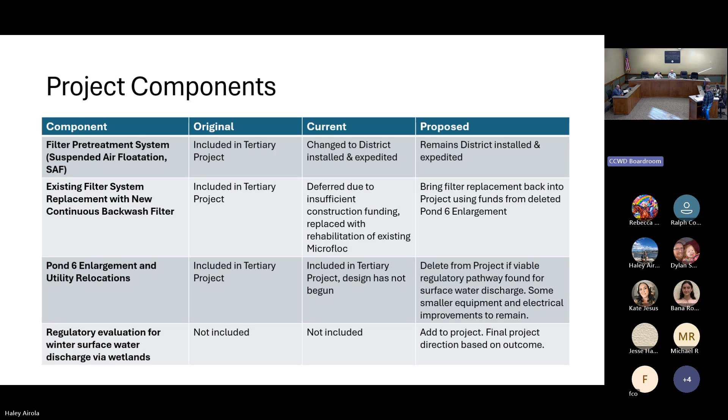There's discharge permit requirements, the nitrogen limits in the effluent that discharges into Little John Creek are a little bit challenging, but we think the existing system right now filters the effluent out of the pond, the treated effluent out of the pond, and sends it to the golf course. But then the backwash that comes out of the filter goes right back into the pond, so it's this never-ending cycle of backwash back into the pond that's supposed to be a finishing pond.

So the SAF is going to extract all that algae and other contaminants out of the water before it gets in the filter. The backwash will be very limited, it'll be really clean in comparison, so we won't have that endless cycle of discharging back into the pond that you have to keep retreating in this cycle. Over time, we think that nitrogen level could go down.

The quality of the water is going to improve. And then we may have to look at some other kind of work, depending on what our nitrogen limits end up being, there might be some other work that needs to get done.

So there'd be some limited Pond 6 utility upgrades for the tertiary pond. There are some pumps at the base of the pond that are kind of a limiting constraint right now because they only pump like 800,000 gallons a day, and our filters are good for 1 million gallons. So we might want to upgrade those so we get the maximum out, and then upgrade them for future expansion of 2 million gallons a day.

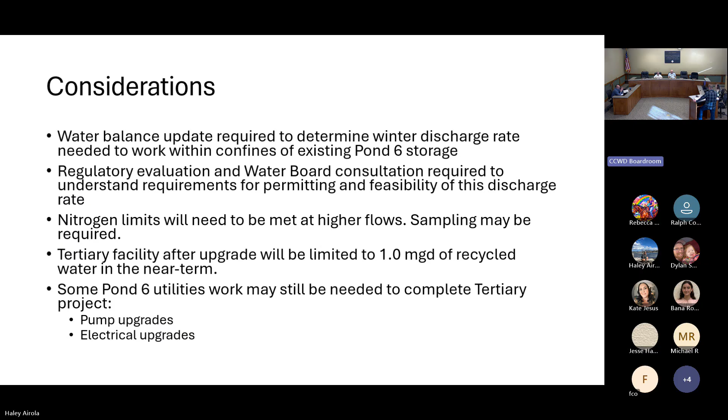This approach avoids partial construction of the dam facility, maintains compliance, but also doesn't put us at risk of going down the route of not knowing for sure if we have enough money to finish this project. It also allows us to get going on this project a lot sooner because the environmental is already complete for the tertiary, and we're at 90% with the tertiary treatment plant design. And if we do get more funding, the dam raise could end up happening the same time or nearly the same time as scheduled for now.

I just want to clarify, this isn't necessarily a big departure for us. This has always been part of the package. In fact, when we renegotiated the letter report in the project partnership agreement with the Army Corps a year ago, we were hoping it would have been done a year ago. We finally got an approved version that we signed a month ago, and we're still waiting for their signature, but we're expecting that anytime.

That's just an example of what Kevin was talking about, the delays that we've seen in this project all along. As those circumstances have changed, we've reevaluated sequencing and prioritization, but this was always a part of the project, and we don't even need to renegotiate the letter report again, which we don't want to have to do. This was already in there. I think the Army Corps will understand that we may be resequencing and pursuing additional funds, but this was always a part of the package.

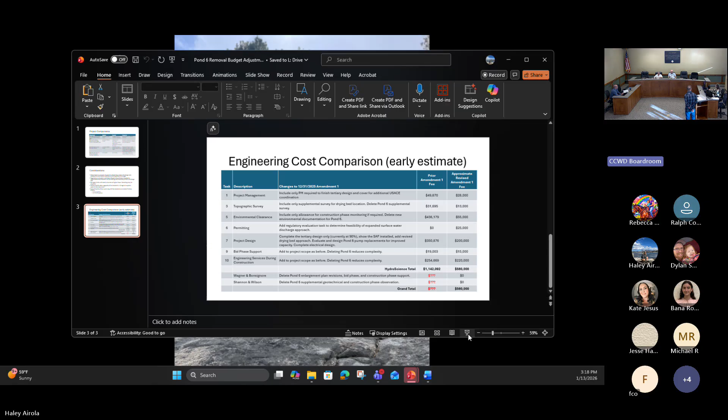And the funds are more and more competitive. We received an increase in the total authorized amount in the Water Resources Development Act last year, but we didn't get it appropriated in the federal budget, and it may be hard to do that going forward. So we're just not sure that we'll receive that additional increment or any future increment after that. We're trying to prioritize and maximize the use of the funds that we have right now, with some uncertainty about costs going forward.

This will help address a huge part of the issue there, and I think set us up for success going forward. So in your addenda, in the package, we have the cost of 1.14 million. That includes the environmental for the dam raise. So what we'd be bringing back to the board for approval, if this engineering committee agrees, would be roughly

$560,000. That would get us the low-level project manager, be a lot of in-house work, finish the project design, and engineering service during construction for the hydroscience to support us during the construction. That'd be all in-kind contributions, and it would go towards our $4 million of in-kind contributions that we're required to pay.

I have a couple of questions for you, Kevin.

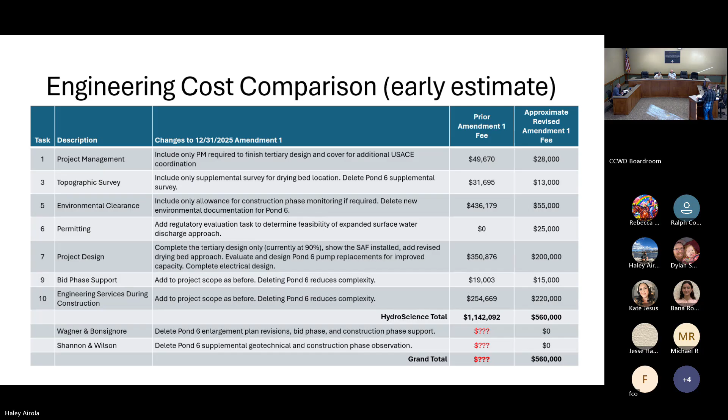This is in my division, and I've looked at it pretty closely, particularly on the dam raise aspect. If my memory serves me correctly, one component of the dam raise was to scour out the existing footprint of the water impound area. What would prevent us from, instead of raising the dam, just doing that part? We've got a lot of acreage there. Would it be beneficial to consider increasing the holding capacity of the dam area without raising the dam?

Yeah, I think that is something that could be looked at. The plans we have for the dam raise were from 2009, and they were making modifications. On one side we were going to build an inside fill instead of an outside fill because we didn't have the property for the water line that had to go through there. But the Army Corps has to administer every construction contract. So if we went that route with the 219 funds, they'd have to go through the full environmental review for the federal government, advertise the project as a federally contracted project, and administer the construction contract. So we wouldn't have the ability to hire a local contractor. These federal contracts are bid on by big name contractors like Kiewit, the type of people that come in and do federal contracting.

Juan, I'm really sorry to interrupt you, but did you want to do public comment for that last item? I see there is a hand up. Sorry about that, Juan. No, Ralph, go ahead. Ralph, do you have public comment on the item before? I didn't pay attention. You're muted, Ralph. I'm sorry, this is for 5A, I jumped the gun, I'll wait till he's done. Yeah, okay, thanks. All right, thank you.

Like I was saying, the mainline installation is complete. It has also been pressure tested and disinfected. The contractors are probably finishing the B tank connection at this point, and they're going to start doing the PRV tie-ins. We have 5 pressure reducing valves through the system. As soon as that's done and the main line is online, we're going to start doing the service lines, followed by the paving.

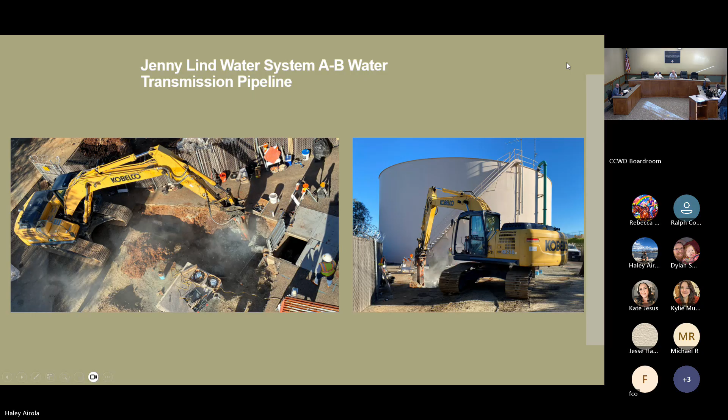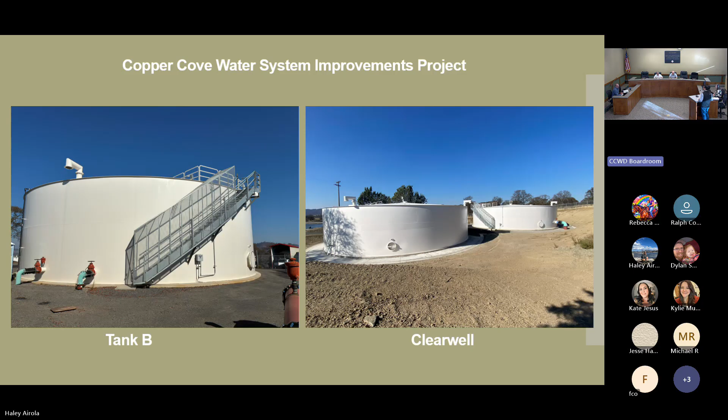This is going to be the Clearwell and B tank projects at the Copper Cove. B tank on the left had the year inspection after completion, and there was some corrosion rust built up on the upper, above the water level. So with that said, Crosno is going to drain the tank, recoat it, and complete the inspection. On the right, the new clearwell passed with no issues on the year inspections. The following tanks are going to be inspected at their year mark. Any questions?

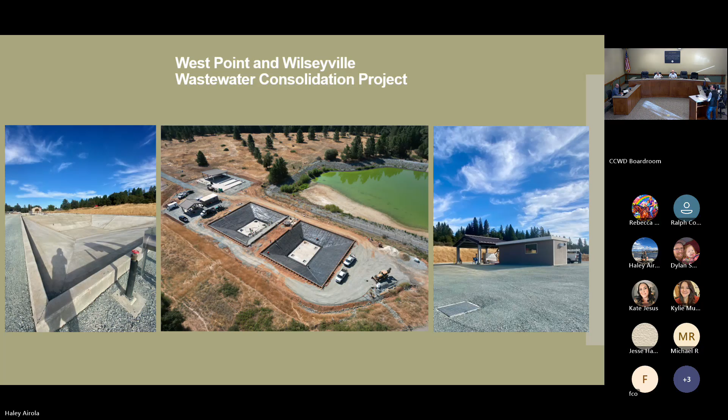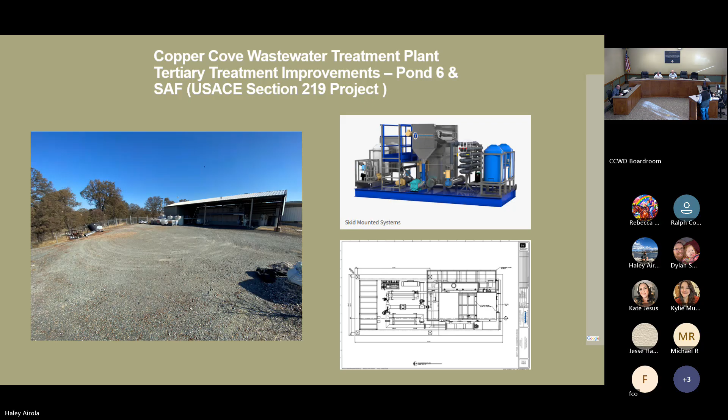As Kevin mentioned, this is the Copper Cove wastewater treatment plant, the SAF and the Pond 6. I included some pictures where the new SAF is going to be located, next to the Trident filter, right there under the canopy. The SAF filter is going to be in a skid, so our district staff is going to do construction, pouring concrete and piping for the new SAF. Questions? I'll let you know. Thank you.

This is the West Point Drought project. At this point, the phase 1 submittals have been forwarded to Cal OES. That one includes the 60% design, environmental documentation, and permitting. Cal OES has completed its reviews and has forwarded to FEMA. Based on previous experiences, it seems like it's going to be 12 to 18 months before we get authorized for construction.

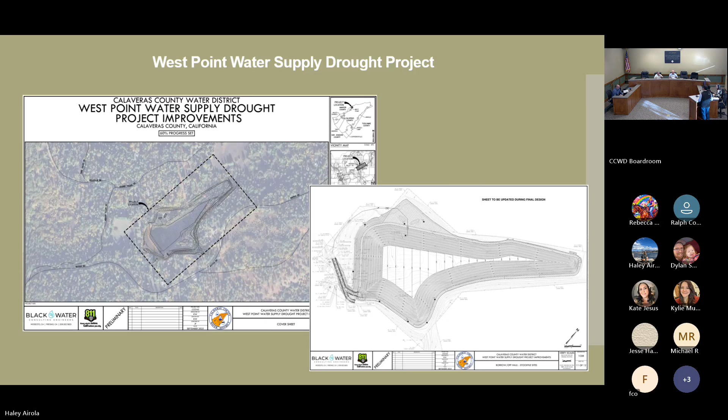Lake Tulloch Intertie. This project is 100% completed, the design. We have forwarded the preliminary encroachment permit to the county, and they provided some feedback. Right now, they're incorporating the feedback into the 100% designs. It's anticipated that this is going to go for bidding in spring, in a few months.

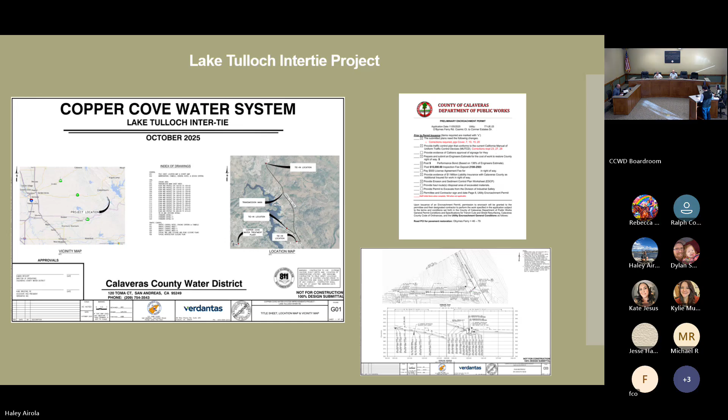Huckleberry Lift Station. This is another project that is 100% design. It also has clear CEQA, and we're just waiting for construction funding. Hopefully, it's going to be through the oncoming grant opportunities.

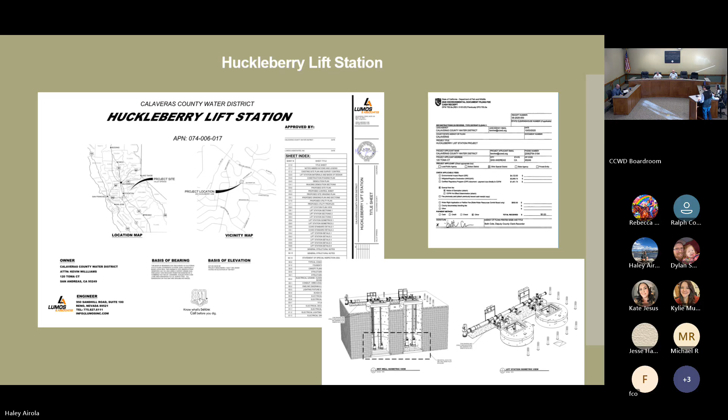La Contenta wastewater treatment plant improvements. This is going to be the phase 3 improvements for this water plant. At this point, it's hard to see, but on the right picture, there's an outline of these yellow lines, and ECORP Environmental is doing the studies, so we can complete the 100% designs for the project. At this point, we have 90% designs. We're just waiting for the environmental to be clear, so we can finish the design. Similar with the Huckleberry, we're hoping that it's going to be funded by grants in the near future.

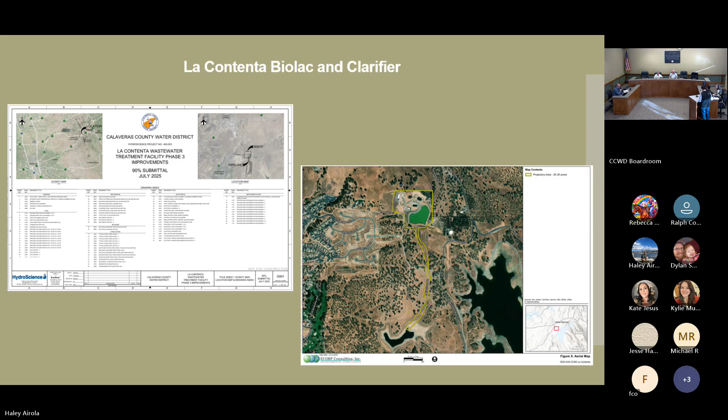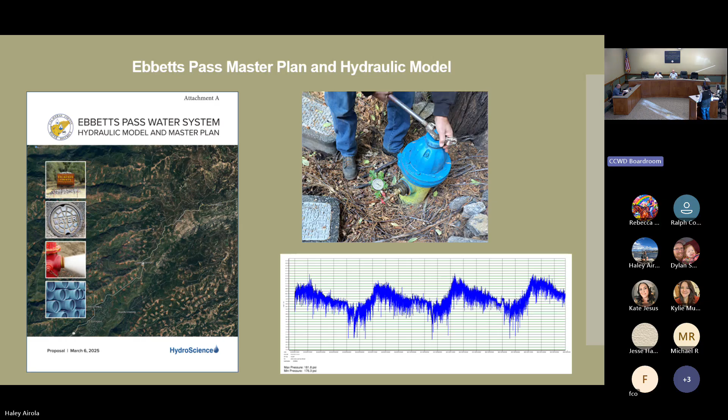This Ebbetts Pass master plan and hydraulic model is almost completed. We're just waiting on some SCADA and infrastructure information. We expect maybe in a couple of weeks to get the draft report for the master plan.

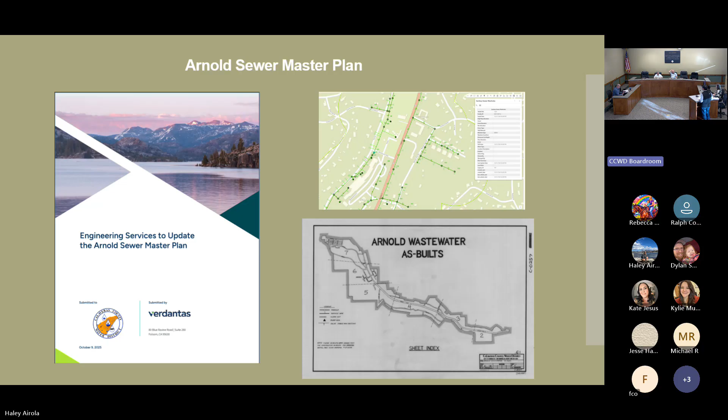This is the Arnold Sewer master plan. Verdantas and district staff are developing a flow monitoring plan. This is going to help us figure out more capacity for the lift stations, and more especially issues like I&I that we might be having. These efforts are going to probably be starting in a month from now, like mid-February. Probably going to be 6 to 8 locations for flow monitoring.

Yes. That covers our CIP. Thank you. Anything?

You mentioned at the onset that you had tested all the ductile iron piping on the Jenny Lind A&B water transmission pipeline. Yes, sir. We had several comments about asking questions about leakage. When we pressure tested that, is there a maximum level of leak that is acceptable? Yes. So the stretches of pipe that we test are roughly around 1,000, and the longest one tested at one time is 2,000 feet, and they're only allowed a maximum pressure drop of 3 PSI in a 2-hour period.

So really, honestly, no leakage is acceptable on jobs. That 2,000 linear feet of piping, that was a 12-inch pipe that went in there? 12 and 14-inch. A 3 PSI drop, I mean, you might get that if you lost 5 gallons of water. Not even that. So it's pretty well tight.